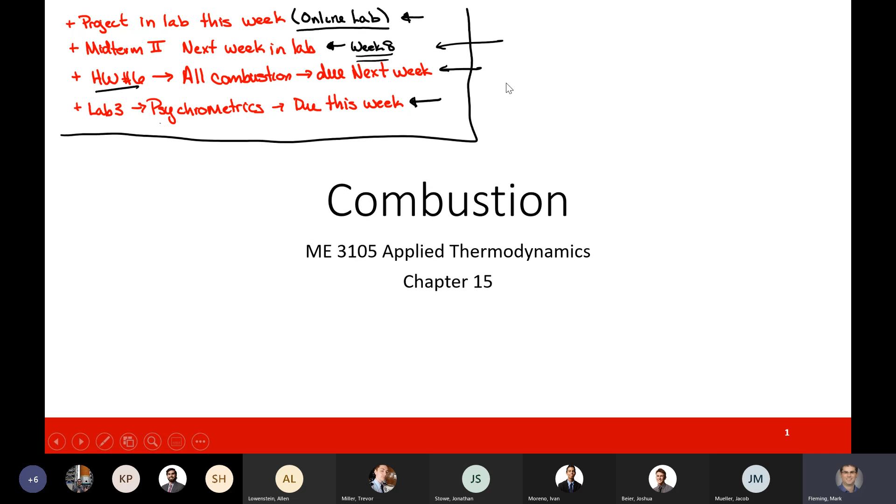Okay, so that takes care of all of the general announcements. Let's go ahead and dive into our discussion about combustion. In particular, we want to get into the first law. To start this discussion, I want to go back to Thermo 1. For Thermo 1, if we had an open system, we could say we had state 1 here. We could say we had some sort of heat transfer, using the standard approach as heat transfer in. And then we could have some sort of state 2.

If we recall from that analysis, we could say, well, the mass flow rate, if we have a single inlet, single outlet, that just becomes a constant. And if we let kinetic energy and our change of potential energy basically equal 0, what we ended up with was for a single pure substance, Q dot in. This would equal the mass flow rate times enthalpy 2 minus the enthalpy of 1.

And so this was the setup. In this case, we had our pure substance. That could be CO2, it could be water, it could be air, it could be steam, whatever we chose it to be. We had that, and we just had to look at this change in the enthalpy. But again, this was for a pure substance. It worked because we had water coming in, we had water leaving.

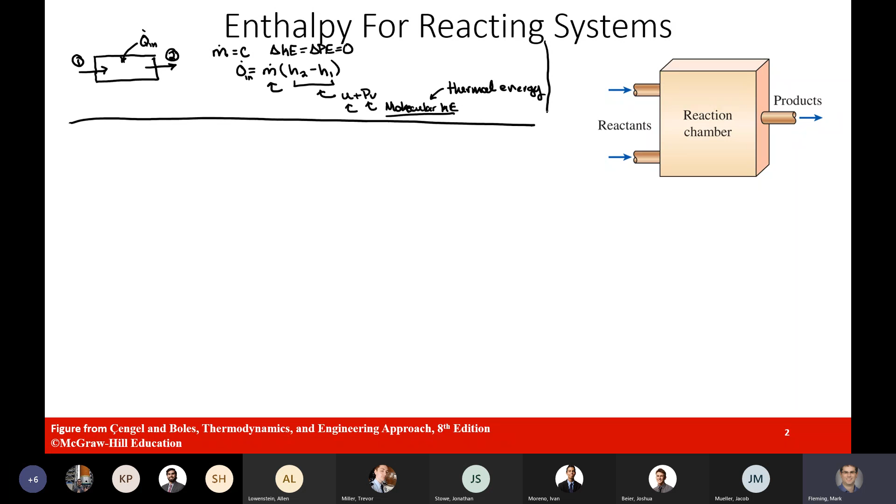Okay, so that's what we've done before, but now we're going to change things up a little bit. What we want to do is take our fuel that we're going to bring in, and air. And so this could be state 1, this could be state 2, and we're going to go through a chemical reaction. That chemical reaction is going to change the molecular structure, and in terms of our products, we're going to have water, carbon dioxide, some nitrogen, and some oxygen generally as our main products.

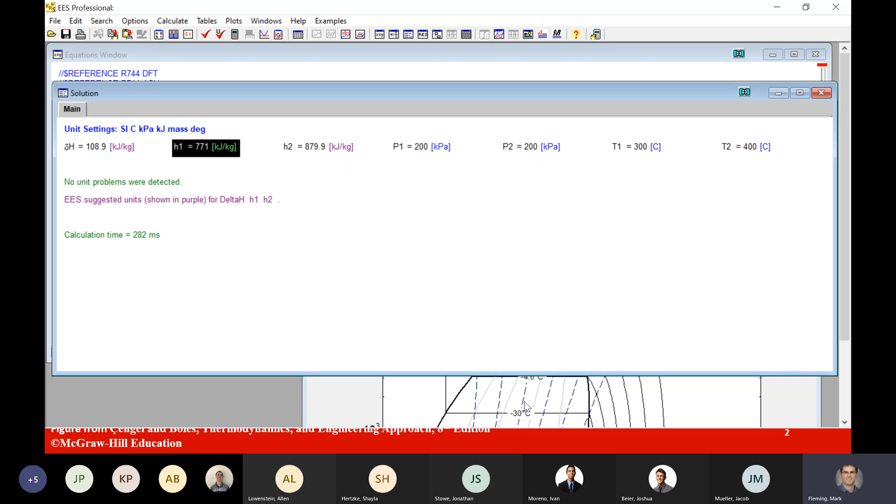Now, if we wanted to visualize this, this is going to be a pH plot. If you remember those from our discussion of the chiller system, we have the pressure and the enthalpy. And this is the IIR reference. We see that the enthalpy is 0 somewhere in the compressed liquid region, generally at a very low pressure, and it just scales from there. Now, the ASHRAE standard sets the 0 point at a specific temperature at the saturated liquid condition, so that's a substance dependent value. It just happens that for this one it should be right about here.

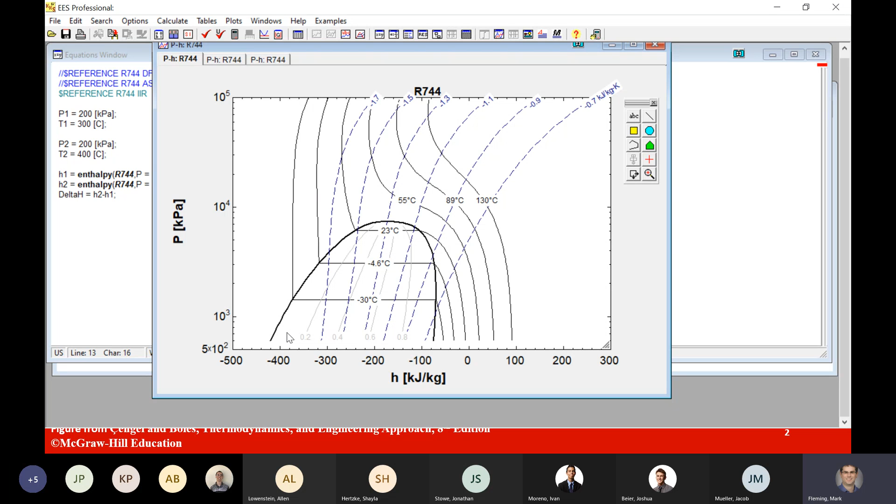This side would give us a negative enthalpy, this side would give us a positive. And for this last value, in this case it put the 0 enthalpy in the superheated vapor region, and everything inside the vapor dome now is going to have some sort of negative enthalpy. But having a negative enthalpy is fine as long as we're using it with a relative value. So we still have to look at that delta H instead of just the absolute enthalpy.

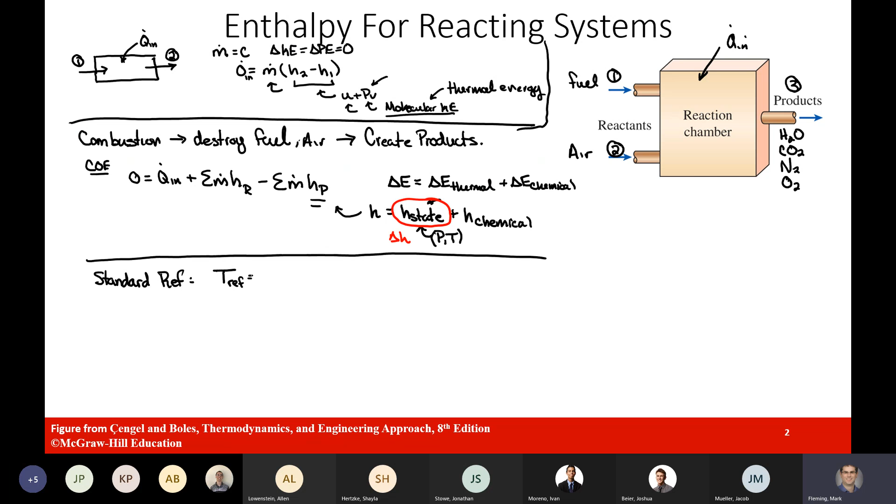Define that the reference temperature is going to equal 25 degrees Celsius, and the reference pressure for this state, because we need two independent variables that are both intensive to define it, is going to equal 1 atmosphere. If you wanted, that's 101.325 kilopascal, and that would be like 14.7 psi absolute. And so that's going to give us the reference state to help us out.

The value that we're going to be able to create is that the enthalpy at any given state, so enthalpy of temperature and pressure, is going to equal the enthalpy of that state that we go to the table and look up, temperature, pressure, minus the reference value. So this is going to give us the delta H. So now we have the absolute amount of enthalpy for that value relative to a standard point. And then we add plus this chemical energy.

Now we're going to add one more thing here. We're going to add some bars on top of this. Why? Well, when we did the stoichiometric balance, we said this was going to be a molar problem. And so now we're going to have to talk about our energy in terms of a molar energy. And so this is the form that we're going to want. Now we can focus on this chemical energy at the standard reference.

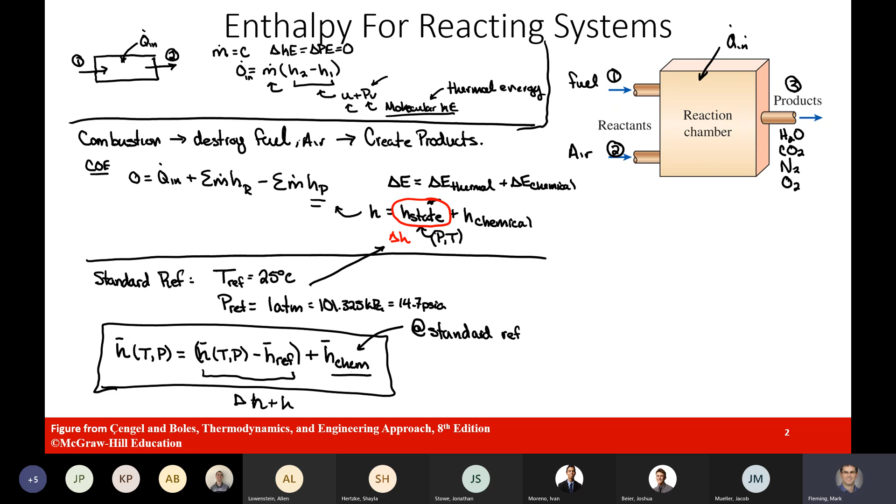And so what we want to do now is focus on this chemical energy, the chemical energy required to basically create a molecule at the standard reference point. The simple answer is we're going to redefine it as H with a bubble and F, and that value is what we refer to as the amount of energy in the chemical structure that is required to form that molecule. So enthalpy of formation, because we're forming the molecule.

And so this is the form that we're going to write out in the actual setup. Again, it still has our delta H in terms of the state point. So this is delta H of the state, and we'll put a bar above it. Then we had the H chemical; that becomes the enthalpy of formation, and then the total enthalpy is just equal.

Now again, I want to point out H bar, the units on this will be kilojoule per kmole in the SI system. So again, molar basis for this analysis. So we do have to keep track of everything that's going on, because it's going to be very important to keep track of our units, because we will eventually want to create a mass basis as well.

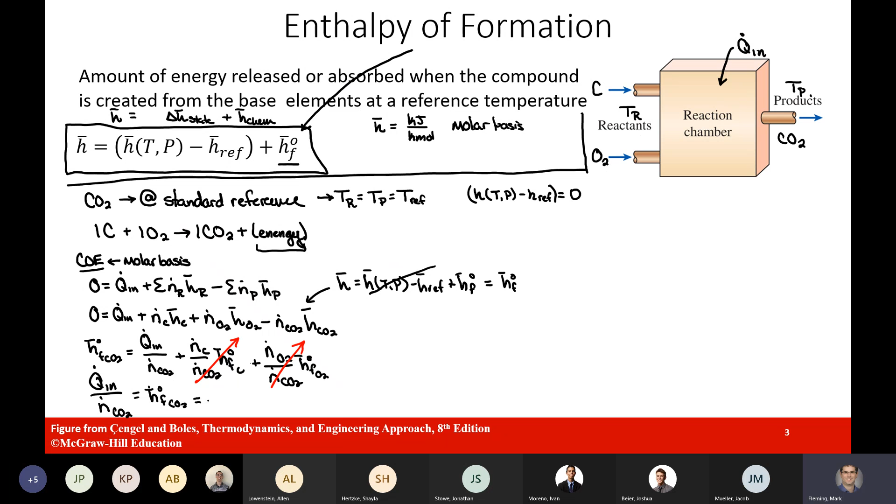And then we can look up oxygen, O2. We're going to see that that's also 0. So this goes to 0, this goes to 0. And rearranging this, we'll have Q dot in over N dot of CO2. This is equal to the enthalpy of formation for carbon dioxide, which is minus 393,520 kilojoules per kmole. And so that gives us the amount of energy that it would take to form carbon dioxide.

Now, we'll note that the enthalpy of formation here was negative. What does that mean? Let's rewrite this one more time, doing another Thermo 1 trick: if we had heat transfer in, we could flip this around. We now have minus heat transfer out over N dot CO2, and the minuses will cancel. We're going to have heat that is released as we combine oxygen with carbon to form CO2. Heat being released means a minus enthalpy of formation at the standard point. This means it's an exothermic process to form the substance, so we have Q out.

And if we have a positive enthalpy of formation, it means it's endothermic, which means that we'd have to put heat in to form a given substance. We can now relate how much energy is going to be exchanged in this process. Traditionally, that energy will be talked about in terms of heat. This enthalpy we could also refer to as the enthalpy of combustion. According to your textbook, that's just an introductory term. We'll generally focus on the enthalpy of formation, so we can see how much energy is exchanged at the standard pressure and temperature and determine the amount of energy that's going to be released.

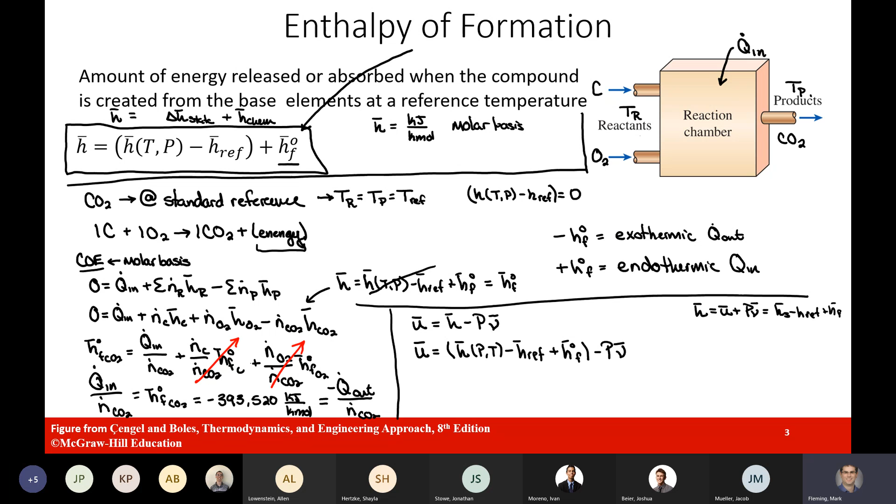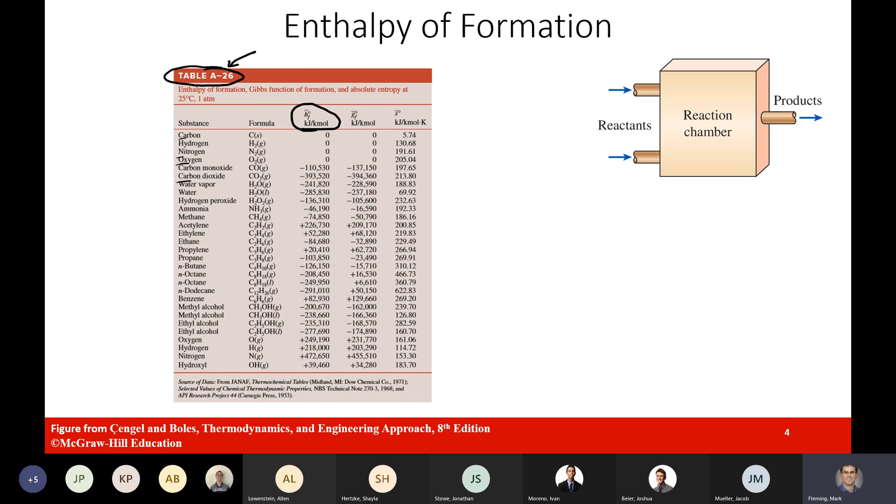Okay, so we've already talked about where to find all of these values. So if we take a quick look here, you can see all of the different fuels that we have. We have carbon, we have nitrogen, we have oxygen, we have carbon dioxide, we have water in both liquid and vapor forms, and then we have a whole bunch of fuels. And so we'll be able to now look up all of the enthalpies and enthalpies of formation, and we can now just go ahead and use those. So that is where we'll find those.

Now, what we want to do is get into how we are going to apply this for the first law. For the first law, we are generally going to have to make some assumptions. Now, we're going to generally assume for right now that we're going to be dealing with an open system. And this is going to... and the more important one, and we'll see why this is very important, is that we can treat everything in our combustion process as an ideal gas.

The result of this means that we'll be able to take our enthalpies, the molar versions, and these are only going to be a function of temperature, because that was one of our statements of ideal gas: there's no pressure dependent portion. And so this is going to make our lookups a little bit easier, our life that much simpler. We no longer have to worry about the pressures or partial pressures of each component. We just care about the temperatures to figure out what's going on in terms of energy. So that will help us out quite a bit.

And so we're also going to want to go ahead and say the kinetic energy is going to be pretty small. If we think about it, most of the time when we dealt with systems in Thermo 1 and Thermo 2, we said we could neglect those because they were already 3 orders of magnitude smaller. It's about to be a whole lot smaller once we get into chemical energy, because we're basically giving more energy to that enthalpy term. And so a lot of times kinetic and potential energy can kind of be hand waved away unless you're dealing with like a jet engine, where it would be important for a propulsion system. But for now, we'll go ahead and hand wave them away.

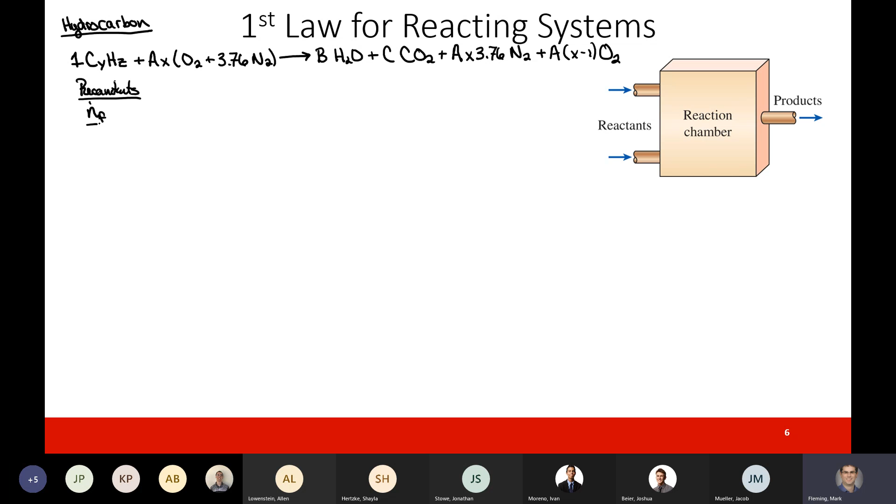Then we'll have AX times the 3.76 molecules of nitrogen, plus then we'll have the AX minus 1 of O2. So this was the stoichiometric setup that we had. And now what we can do is if we look at the reactants, well, we're going to have our first component, we'll have N dot fuel over N dot fuel. So our first coefficient will be 1.

You'll then have oxygen coming in, so N O2 divided by N of the fuel. This will give us A times X. Since we know A by definition is going to be Z over 4 plus Y in terms of the molecule structure, we can then multiply that by X. And so we can see that we can get all of these molar flow rates. And so we can do N of N2 over N dot of the fuel. This is going to be equal to 3.76 times A times X.

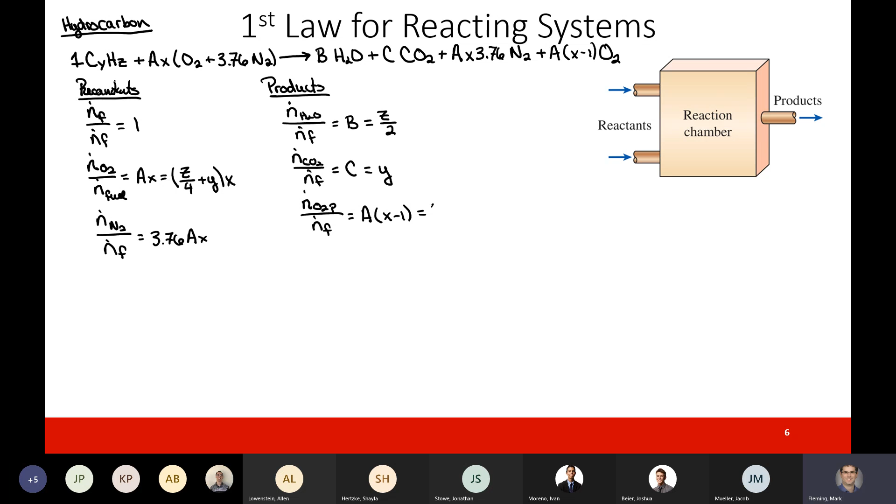And we can repeat this for the products. In terms of the products, we'll have H2O divided by fuel. This is going to equal, in this case, B, and B is going to be Z divided by 2. And then CO2 over N dot fuel, this is going to equal coefficient C, which from our balance before was just equal to Y. Then we can do O2 in the product side, divided by N dot fuel, so equal A times X minus 1. And in terms of A, this is Z divided by 4 plus Y times now X minus 1.

And then we'll have the molar flow rate of nitrogen over the molar flow rate of the fuel. This is equal to 3.76 times A times X. And so we see where all of the stoichiometric balance is going to come into play in terms of our first law accounting equation. We can now bridge the gap between the chemistry setup and our energy setup. We can now figure out the flow rates and all of the enthalpies. Once we do that, we can figure out the amount of heat that's being released. And then since we know the molar flow rate of fuel, we could back out how much mass of fuel we would need, because we would know the molecular weight of the fuel, and we'll be able to then scale it.

Now that's exactly what we're going to do in the example problem here, but I want to point out a few things. We're going to put it in the last textbook form here. If we have Q dot in per molar flow rate of fuel, we'll have the sum of all of the individual products divided by the molar flow rate of fuel, times the enthalpy of the state minus the reference enthalpy plus the enthalpy of formation, minus the sum of all of the reactants over the fuel, times the enthalpy minus H ref plus enthalpy of formation.

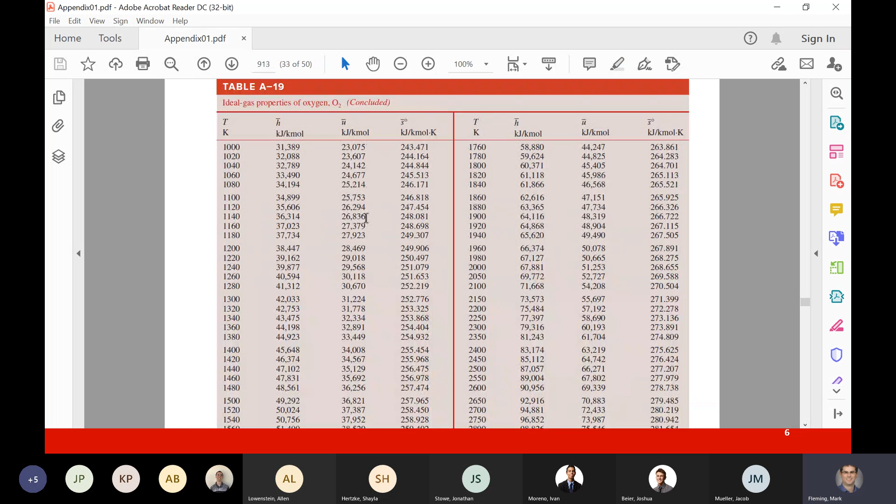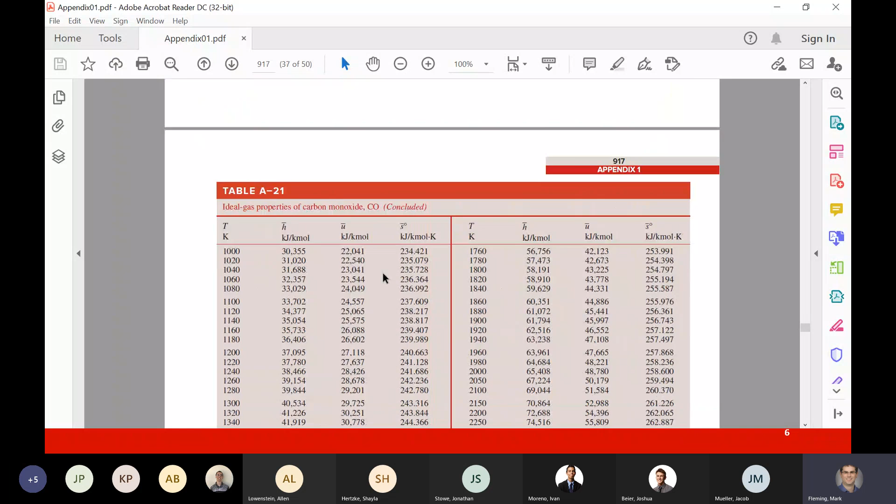And then if we continue scrolling down, we'll have CO2. CO2 was one of the product gases we had. So we'll be able to get all of the properties for carbon dioxide at different temperatures. We have one for carbon monoxide; we're not going to worry too much about carbon monoxide. We have one table for hydrogen; we're not going to focus on hydrogen, but now we have water vapor. And so we can now get the enthalpies of water.

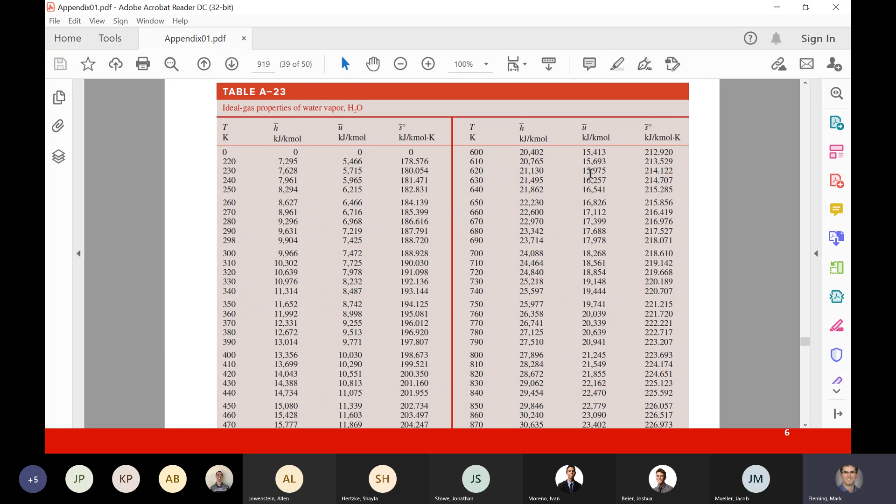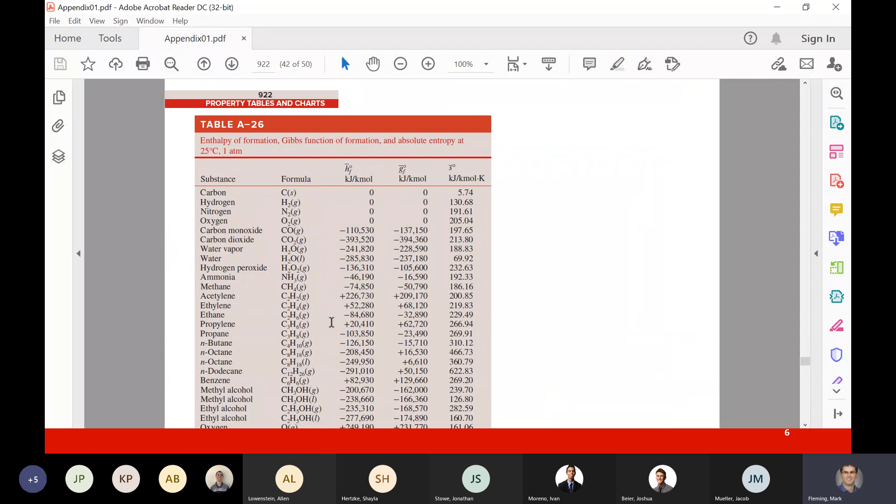And so if we go back to what we were looking at, we said we needed CO2. We have a table. We have water. We have a table. We have nitrogen and oxygen. All of those are going to be found in tables A18 through 23, and the later tables are going to be where you can find the enthalpies of formation.

Now, the last thing I'm going to note is for solving homework problems, to make your life easier, we will tell you what the temperature of the products is, and what the temperature of the reactants is. We'll show probably end of this week, beginning of next week, some cases where we are looking for this temperature, and it becomes a much more complicated process because you're going to have to iterate across 4 different tables. And so it gets to be a little bit tricky.

Okay, so that's where we're going to end today in terms of our discussion of energy. On Thursday, we're going to work an example problem of the first law, so we'll be able to apply all of these details. But that's where we're going to end it for class today.